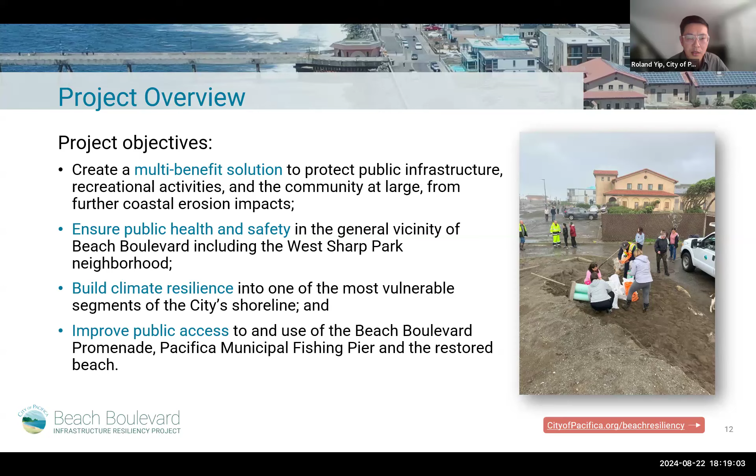Next slide, please. These are the project extents, located in northern Pacifica on the western edge of the historic West Sharp Park neighborhood. The extents range from north of Paloma Avenue to south of Clarendon Road, including the entire seawall, and from Beach Boulevard to offshore approximately 400 feet.

There are 3 segments to the wall. There's the north wall, which is in the worst condition and has had several failures in the past couple of years. There's the pier wall system located in the middle at the Pacifica Municipal Fishing Pier, and you can see it by the exposed sheet piles when you're over by the pier. And then we have the south wall, which is in better condition than the north wall, but this area experiences more soil getting washed up over the wall. It also has a south gap where there is no wall near Elder Lane.

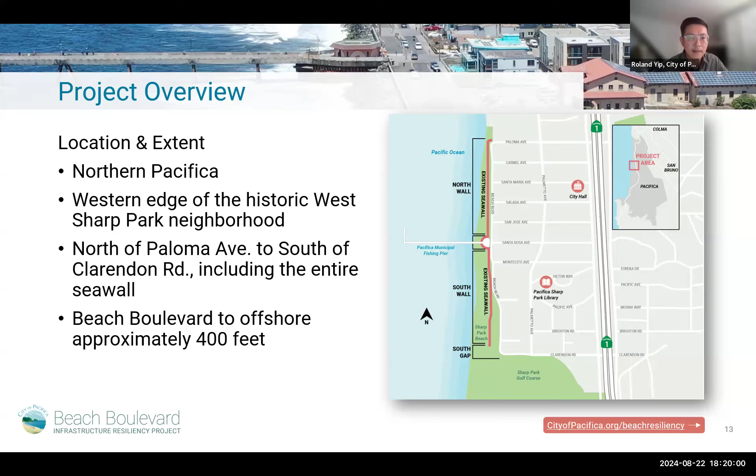Next slide, please. For the project, flood wave overtopping, as shown in this photo on San Jose Avenue, there's severe overtopping that occurs here and also along other parts of the wall, including the south wall. There's continual maintenance needed near the south wall, where sand and overtopping causes us to have our field services crew out there during storm events, and also a lot of cleanup after the storms.

There's erosion and undermining of the north wall. There have been 3 breaches since 2022. Just to show how much more frequent these have been happening: before 2022, in the 8 years prior, there were 3 breaches; since then, we've had 3 breaches in the past 2 winters. Next slide, please.

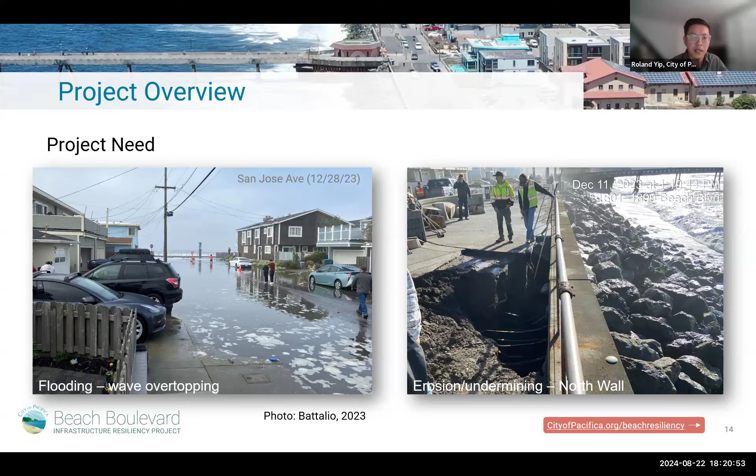Studies and technical studies and alternatives that have been studied include the existing conditions report, multi-hazard risk assessment, alternatives analysis report, and identification of preferred concept design. All of these documents have been shared and are on the project's website for the city. As you can see in the bottom right of this slide, the system chosen from our previous phases is this hybrid coastal protection system, and you can see all the components in this slide. I'll explain it a little bit more in the next slide, please.

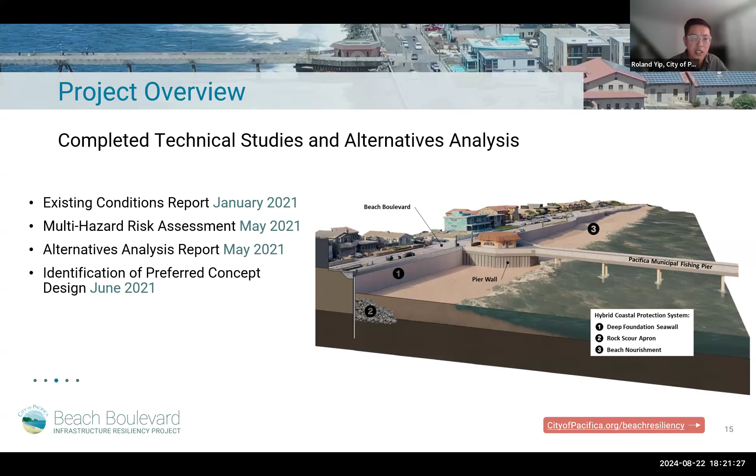Here are some of the project elements. It includes the first 3 for the wall system: a new wall, rock scour apron, and beach nourishment. From our studies and previous phases, we found it was most cost effective to have these three components used together in our project. In addition, there's also drainage improvements and public access and recreational amenities on the project.

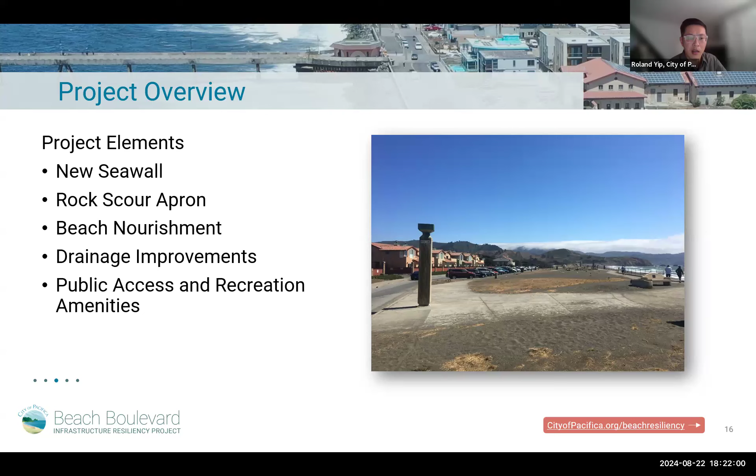So with that, I'll pass it back to Eli to discuss some of the project area and also more of the wall cross sections. Great, thank you, Roland.

Again, this slide shows the general project limits that Roland outlined, and I'll just recap: it's extending north of Paloma Avenue in the north to south of Clarendon Road, also known as the Gap, in the south, all the way to the berm and offshore about 400 feet. Next slide.

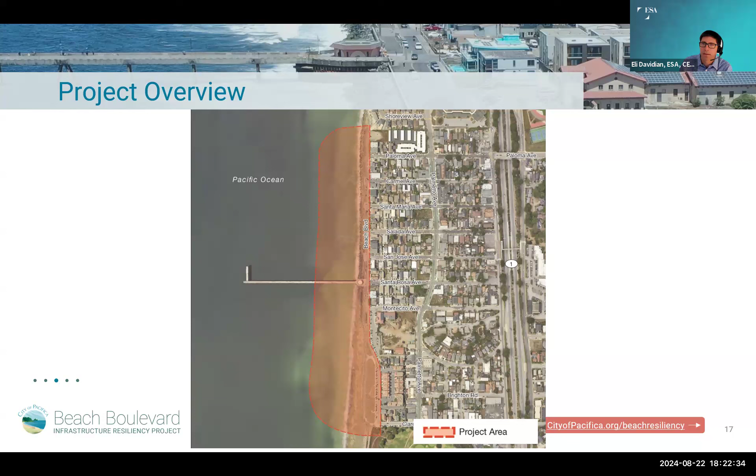I'm going to ask Meryl to use the cursor to call out some of these as I go through, but I'm going to describe some of the key elements of the project that are shown in this plan.

Just note as we go along, we've rotated the plan view to the right, so north is to the right here.

First, the city would replace the existing seawall, shown in the black dotted line along the shore, with a new wall whose alignment is shown in red. The majority of the new wall would be composed of 30-inch diameter steel pipe piles filled with reinforced concrete. This would mainly follow the alignment of the existing wall, but would be shifted landward at the south end, where a smaller concrete wall would be constructed. You can see that deviation in the south from the red and the black dotted line.

Most of the new seawall would be fronted on the ocean side by a rock scour apron, about 50 feet wide, shown here in teal along most of the shore, just seaward of the red line. The purpose of that apron would be to protect the new seawall from being undermined by erosion from waves, tides, and currents. The apron would be composed mainly of large rock that already exists along the shoreline, and the remainder of that existing rock not used in apron construction would be hauled offsite.

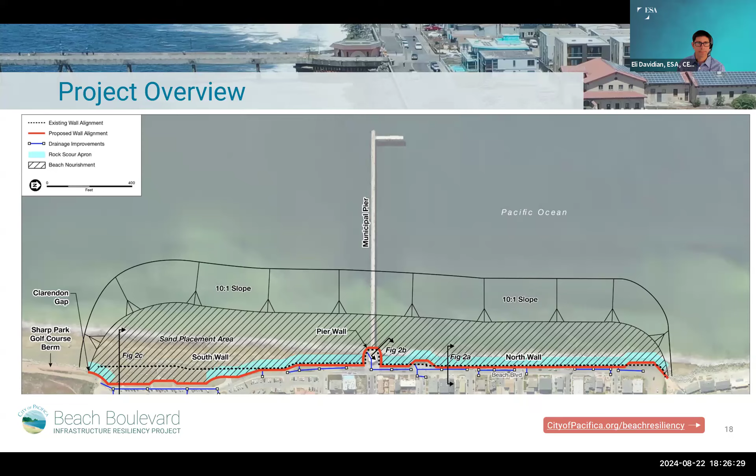So let's start with figure 2A. Next slide, please. Okay.

This first slide shows a typical cross-section of what the wall north of the pier might look like. In this image, you can see the sheet pile wall, the rock scour apron in front of it, the promenade and Beach Boulevard behind the wall, and a utility line shown as an example of how the wall serves to protect existing utilities.

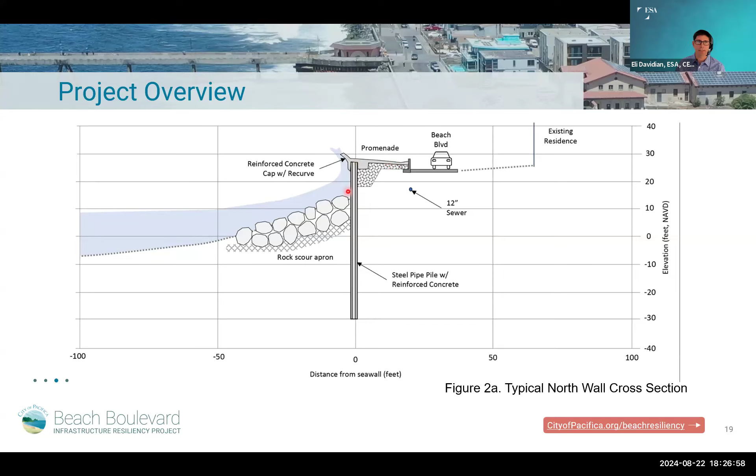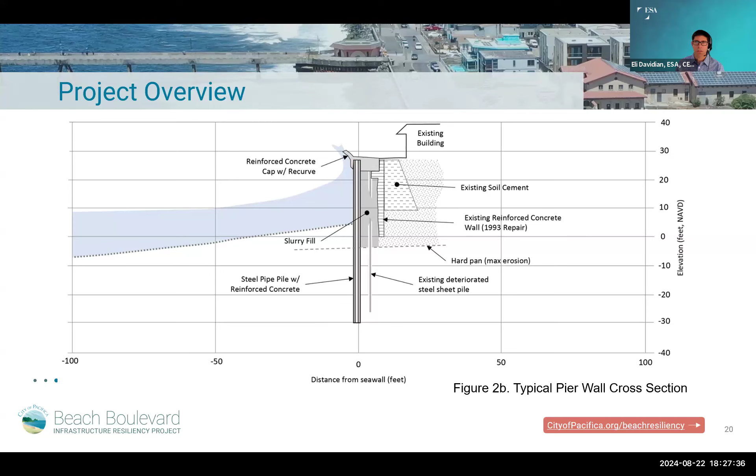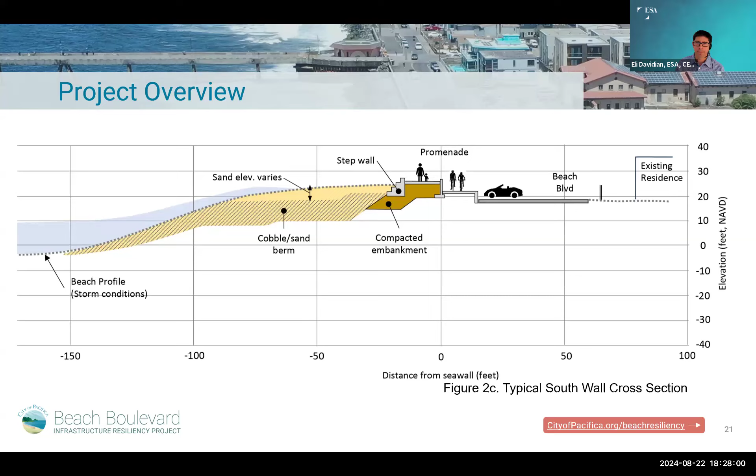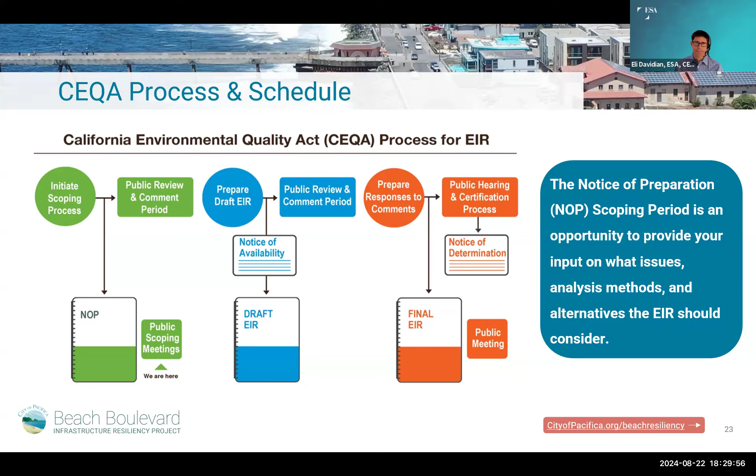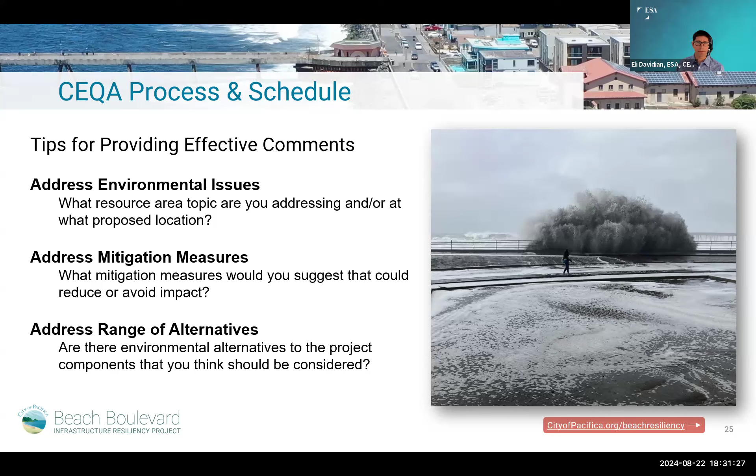Next slide, please. And so that concludes the CEQA overview. Thanks for listening, and I'll hand it back to Ben to take us into the comment period.

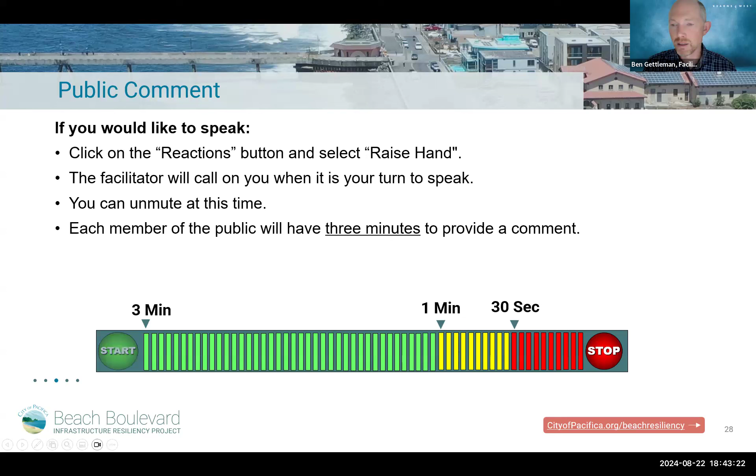We're not closing out public comments, but just in terms of next steps, the main next step is a reminder that the public comment period closes August 30th. So either today or in writing by August 30th, please send in your comments or your scoping comments if you'd like to do that.